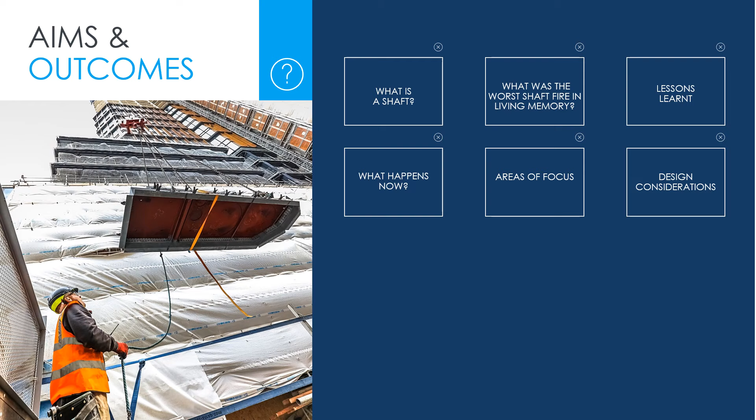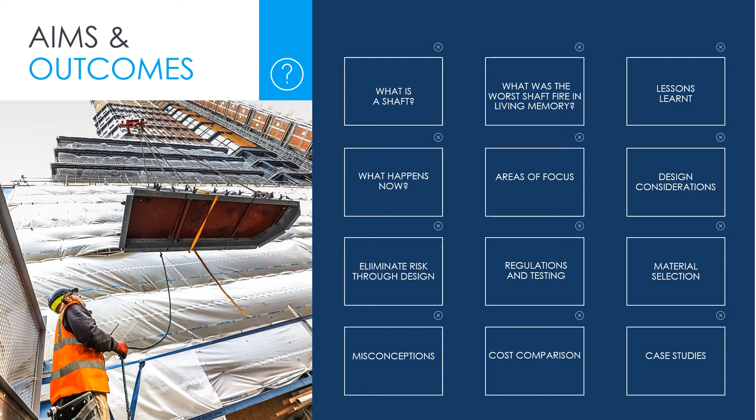We will begin by giving an overview of riser shafts and the challenges they pose. We will then look at the worst shaft fire in living memory to ask whether the construction industry is heeding the lessons learned from this disastrous event. We will explore the areas the industry must focus on to highlight the design considerations which must be adopted to ensure risk is eliminated at a project's earliest stages. We will then move on to give in-depth insight into current testing and regulations, and the materials used in riser construction and the misconceptions surrounding them. Our concluding thought will be one of simplicity, stressing the importance of eliminating risk through informed, efficient design undertaken from a building's very inception.

Ambar Kelly started operating in 2009 as a specialist manufacturer and supplier of modular riser steel flooring. The product was invented and patented by Alex, the managing director. The invention arose from an experience Alex had when he was a project manager for a principal contractor. His boss at the time had taken him to task on the state of the risers. Alex asked what he should do, and the response he received was, 'Invent something.' He was aware that at the time, the current traditional protection was costly and caused delays on projects. So he set to task with what he believed was required to protect riser openings.

He knew the product needed to be cast in to eliminate the risk of falls from the outset. The material needed to be of a solid structure, durable and adaptable to allow for services to pass through. Alex also wanted to invent something that met statutory regulations within risers.

Ambar Kelly has a vast amount of knowledge throughout their team, gained from varying backgrounds within the construction industry. A key focus is on BIM, which ensures all disciplines come together early on, reducing on-site challenges where problems can be detailed out before they reach construction. Ambar Kelly work with principal contractors, frame contractors, architects, structural engineers, and MEP contractors. Our clients consist of the likes of Mace, Lend-Lease, Willmott Dixon, BAM, Wates, McLaren, Multiplex, to name a few.

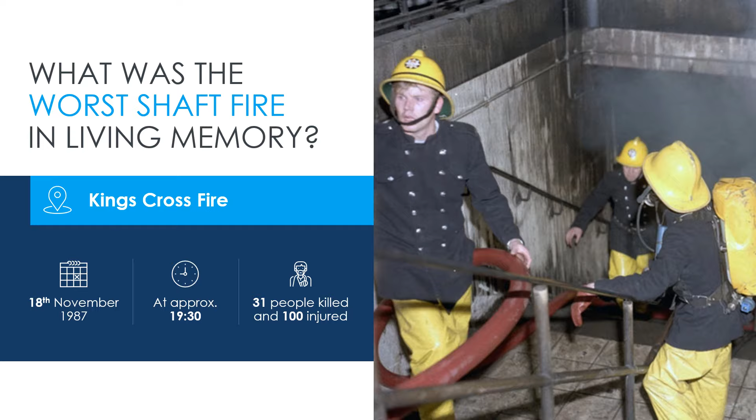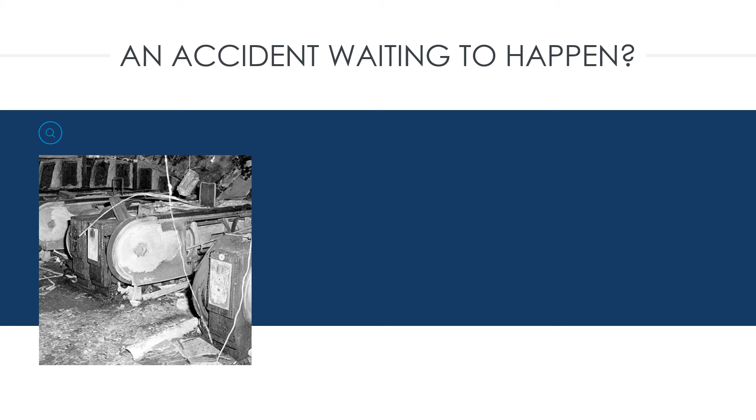But was it an accident waiting to happen? When the public inquiry carried out an investigation into the fire, the cause was a discarded lit match which fell on the timber escalator and rose up the escalator steps. When fire investigators started to examine the underside of the escalator, they discovered there were 17 miniature fire marks from similar activity. But the 18th one actually caught fire.

What made the fire worse? Was it the shaft, complacency, or ignorance? During the public inquiry, computer modelling at the time identified the trench effect, where the flame laid down and superheated the first 20 meters above the fire of the wooden escalator stairs. This finding suggested that the fuel for the fire was the wooden escalator stairs, which were in use for 76 years. It was essentially a dormant fuel cell, an accident waiting to happen.

For this reason, people investigating the cause of the fire questioned the results of the model. They carried out a practical test where they recreated the shaft to see if the exact same results would occur again in a real-life mock-up. And to their horror, they found it did, which validated the computer model.

The King's Cross fire changed how shafts and tunnels of all types are designed, specified and built. With the last wooden escalator in the underground removed in 2013, what were the lessons learned from the investigation into the King's Cross underground fire?

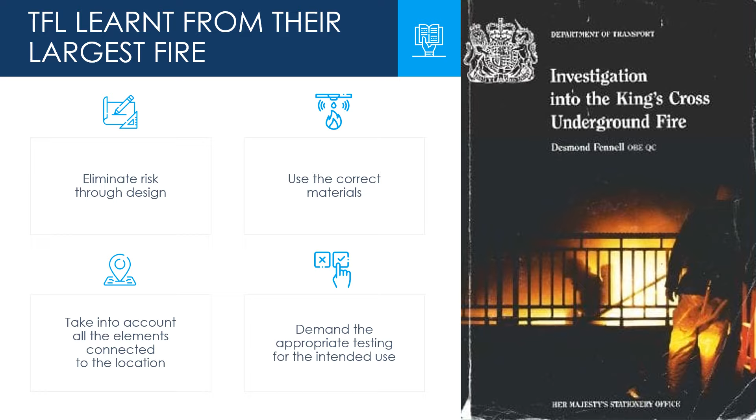For the construction industry, the Grenfell tragedy has had many implications on building design and safety. Lessons learned from both the King's Cross and Grenfell fires include: eliminate risk through design, use the correct materials, take into account all the elements connected to the location, and demand the appropriate testing for the intended use. Isn't it time the whole construction industry learnt from these lessons?

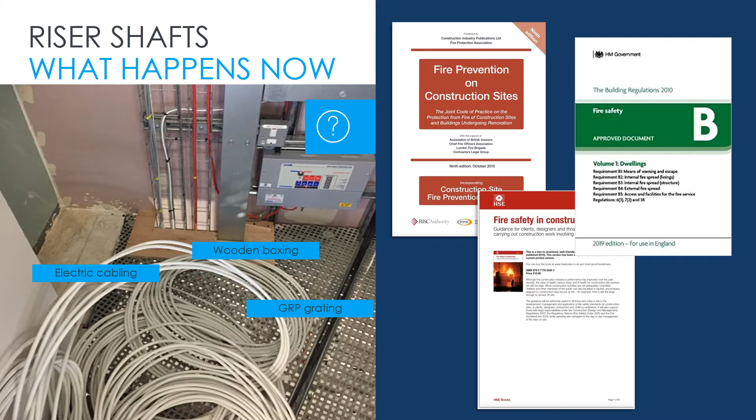In terms of riser shafts in tall buildings, designers need to consider the risks these riser shafts pose and document them in the principal designer's design risk schedule. These risks are well documented in HSG 168, Fire Prevention on Construction Sites, the Work at Height Regulations 2005, Building Regulations 2010, and Approved Document B 2019. The risks are fire and falls from height.

Confusingly, the mitigation measures for the risk of fire are considered differently during construction and when the building is in use. For instance, if we consider a 42-story building with a basement and 2 plant rooms on levels 20 and 40, then fire compartmentation would be required as follows.

For a building in use, as detailed in Approved Document B: 2-hour fire-resisting walls, as shown in Table B4, EI 120. 1-hour fire-resisting doors, as shown in Table C1, E60S. 2-hour horizontal fire stopping at compartment levels 0, 20, 21 and 40 provides 120 minutes integrity and insulation.

For a building under construction, as detailed in HSG 168, Fire Prevention on Construction Sites: design details that prevent the passage of smoke and flames up through a building during the construction phase. 30-minute horizontal fire stopping in shafts every 10 floors - in this case, levels 0, 10, 20, 30 and 40. 30-minute fire doors to all risers on all floors.

Under CDM 2015 regulations, as detailed in Table 1 Designers, when preparing designs, need to eliminate, reduce or control the risks of fire and falls during both the construction phase and for the building's end use.

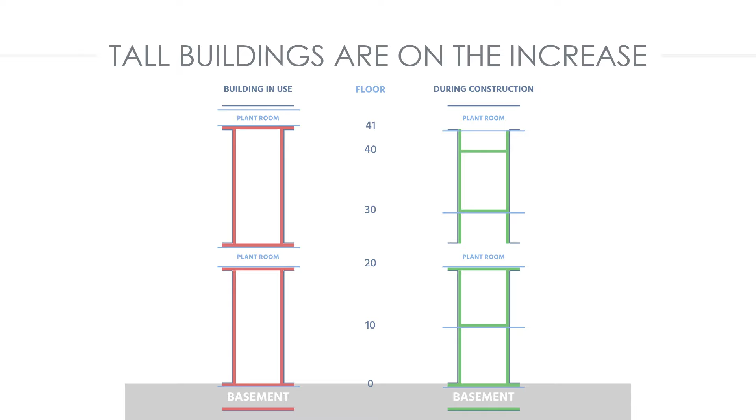So what are the options for the designers to eliminate, reduce or control these risks?

Considerations could include: given that there is a need for a platform within the riser shaft on every floor when the building is in use, allowing for maintenance and servicing to be carried out on ducts, valves, electrical equipment and the like, could that floor be installed early or even cast in to prevent falls from traditional scaffold or platforms during construction? The answer is yes. Metal or GRP grating could be installed to the penetration shortly after casting the floor slab, or a modular steel riser flooring could be cast in.

Given the above, could the platform flooring be used to support the horizontal fire barriers for compartmentation required in both the construction phase and the building's end use? Approved Document B Volume 2, 10.25 states materials used for fire stopping should be reinforced with, or supported by, materials rated Class A2, S3, D2 or better. GRP grating is EN BS 13501 Class C-S3, D2 and so could not be used on fire compartment floors 0, 10, 20, 21, 30 and 40 in our example stated, so an alternative product would be required.

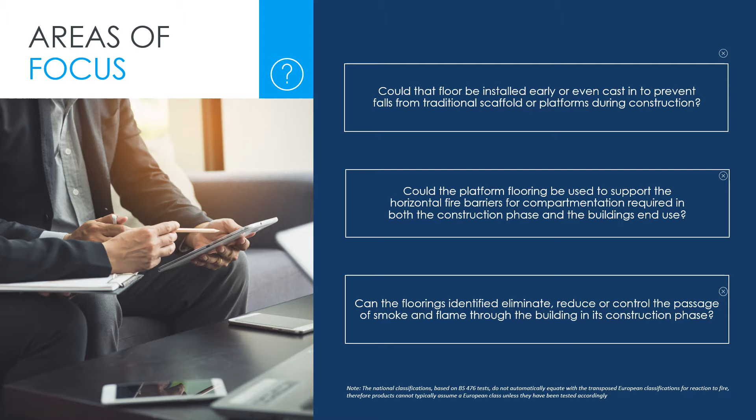The principal contractor has to avoid risk where possible, and advise the principal designer of risks. The client needs to understand the importance of the riser shaft and the risk posed to clients - brand damage is greater than the cost of risers - and their responsibilities under CDM 2015.

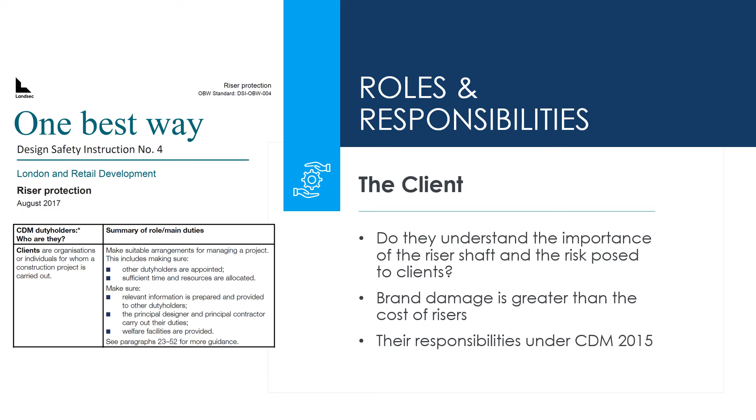One of the most forward-thinking developers in the UK is Land Securities, also known as Landsec. They have produced their own best practice guide called One Best Way Design Safety Instruction No. 4. Within this guide, the company has mandated riser protection within building design and has formulated a concise riser strategy which stipulates that health and safety are of paramount importance.

In order to reduce risk through design, the CDM 2015 regulations, Construction Managing Health and Safety in Construction, should be consulted, as this document states to avoid risk where possible - Page 8, Section 5A.

Digitization is going some way to reducing risk throughout a building's life cycle. It is crucial, therefore, to take advantage of the latest technological advancements into BIM. The BIM design builds everything in the virtual world, so when it comes to the real world, the risks have been reduced. All of the clashes have been removed, making for a far more efficient construction process.

Regulations and testing.

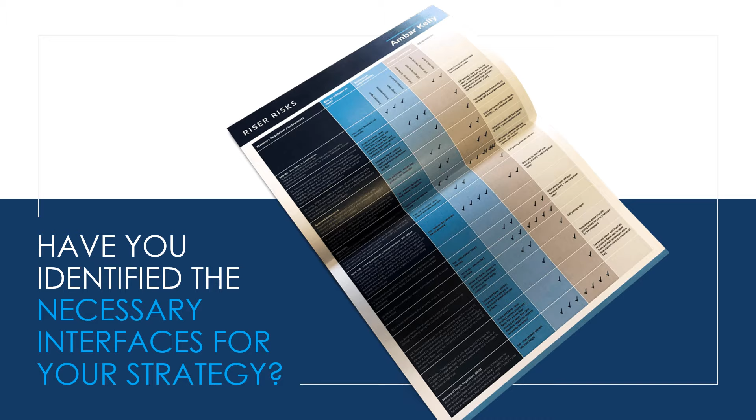Have you identified the necessary interfaces for your strategy? Looking at riser risks and the regulations, there are 13 clauses which touch the riser zone from 4 different guidelines, regulations, and legislation. 12 of these clauses regard fire, and 1 is on falls from height.

Are you designing to all the regulations? The following regulations include fire prevention on construction sites, Joint Codes of Practice, the HSE Fire Safety in Construction Approved Document B, and CDM 2015.

When designing a building, have you reviewed the Joint Codes of Practice, as this will affect your insurance? Have you consulted the HSE regulations for health and safety? Does your design meet Approved Document B? And are you fulfilling your obligations outlined in CDM 2015?

Approved Document B 2019 uses the European classification system for reaction to fire set out in BS EN 13501-1. The standard classes are A1, A2, B, C, D, E, and F.

Classifications for floor materials have slightly different tests, and the class above should be followed by the suffix FL, as in BFL.

Rather unusually, the flooring within a riser is likely to be one product, and so the platform under your feet should be tested in accordance with the floor material test. However, the platform above you is a ceiling, so should be tested in accordance with the standard class tests.

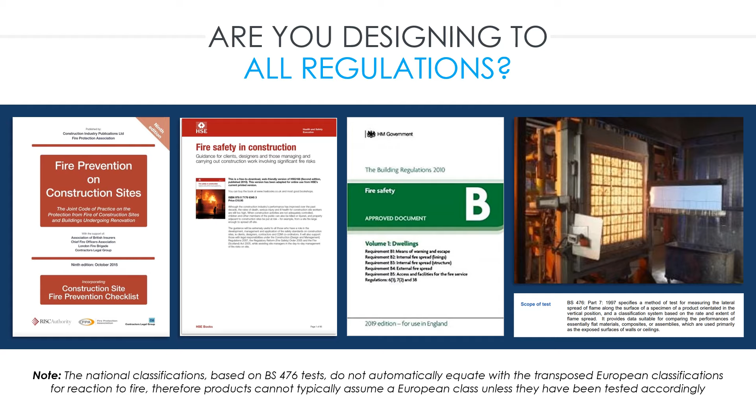The importance of material selection cannot be stressed enough. Therefore, it is essential you consider the combustibility and flammability of the products you specify.

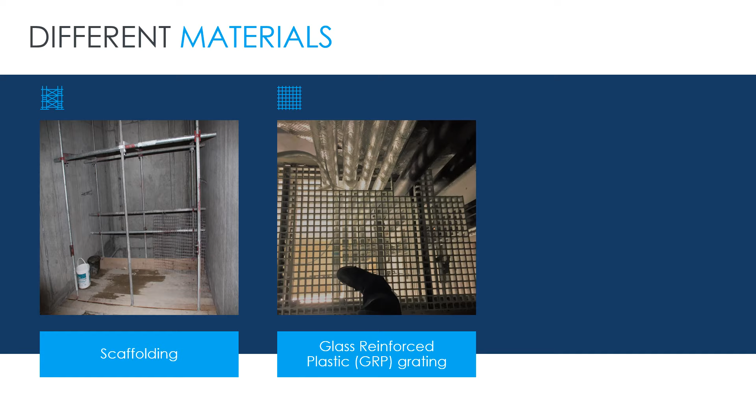Materials burn differently in shafts. Scaffolding doesn't stop fire, and the wrong type of glass-reinforced plastic grating actually acts as a fuel source for fire. However, modular steel riser floors are an alternative which do not burn, nor do they add to the fuel loading of a building.

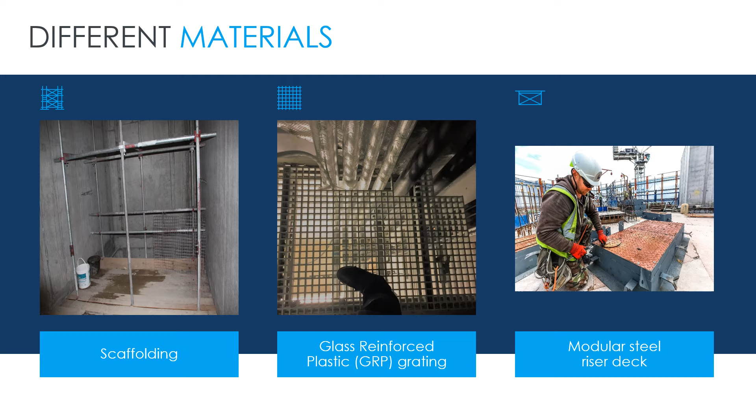Stopping the spread of smoke and flame is essential for the safety and well-being of everybody working on a construction site and through to building occupation and operation. Yet at present, falls from height and not fire is the focus, purely because it is the visible risk. Without sufficient foresight, hidden issues go unnoticed.

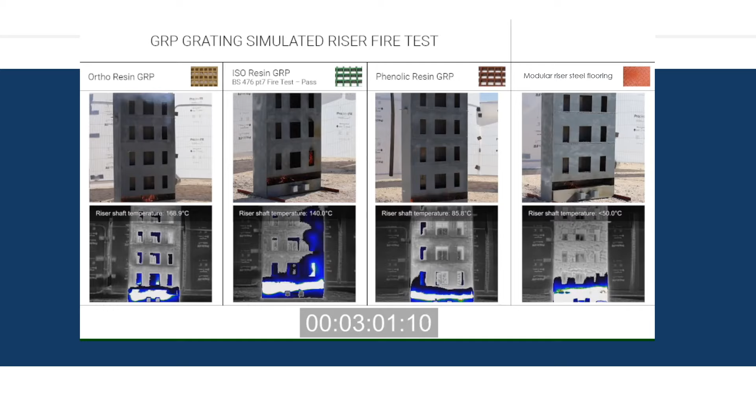Currently, there is no relevant fire test within the British standards for riser shafts. But we have adopted a clever principle which has been informed by the public inquiry into the London Underground fire at King's Cross. An independent fire test was performed on a smaller scale to establish the burning characteristics of various products regularly employed in riser shafts.

In this video, you'll see the real-time video, thermal video, and the temperatures. They are all synchronized to establish the visible burning characteristics of the most popular products used in the construction industry today. The 4 products in this video are ortho-resin GRP, iso-resin GRP, phenolic resin GRP grating, and modular riser steel flooring.

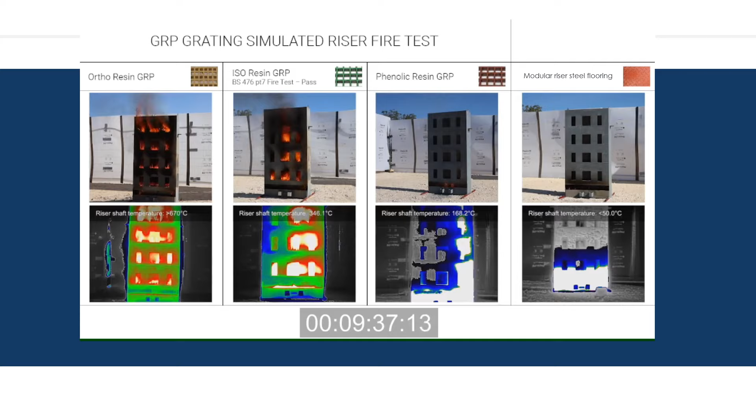From the videos you can see the ortho-resin GRP burns and can do so at temperatures above 670 degrees Celsius. The iso-resin GRP grating is said to meet BS 476 Part 7 standards, but also burns at temperatures above 670 degrees Celsius. The phenolic resin GRP is the only approved GRP product used in the London Underground.

When we're thinking about the design of the riser shaft, we must be considering the regulations. We must be aware of the requirement to stop the spread of smoke and flame between floors to protect the construction workforce during the construction of a building.

And when testing, we should be looking at the products employed in a riser shaft, as they have different burning characteristics. The last of these examples show the modular riser steel flooring.

The temperature in the riser shaft never gets hotter than 50 degrees Celsius. The flames never reach above the first level on the diagrams. It lasts over 90 minutes with 1000 degrees Celsius underneath it, without any loss of integrity.

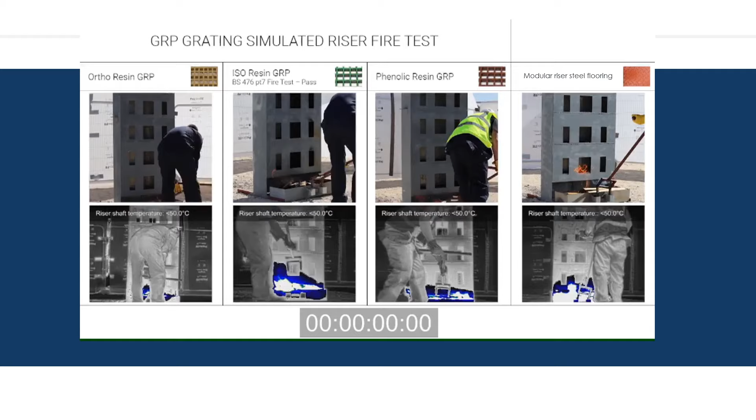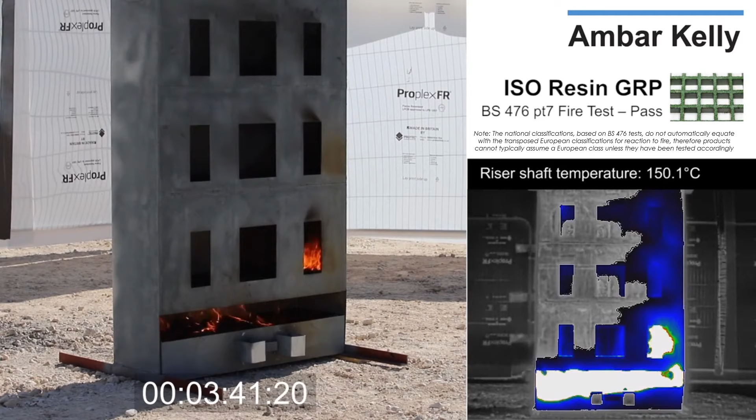This is the iso-resin GRP grating, which is said to meet BS 476 Part 7. In this video, it burns and reaches a temperature of 662 degrees Celsius. From this example, it is quite evident what happens when the iso-resin GRP, which is made from an oil derivative, burns at hot and dangerous temperatures. In fact, GRP grating cannot accurately be tested to BS 476 Part 7, as grating does not meet the test criteria.

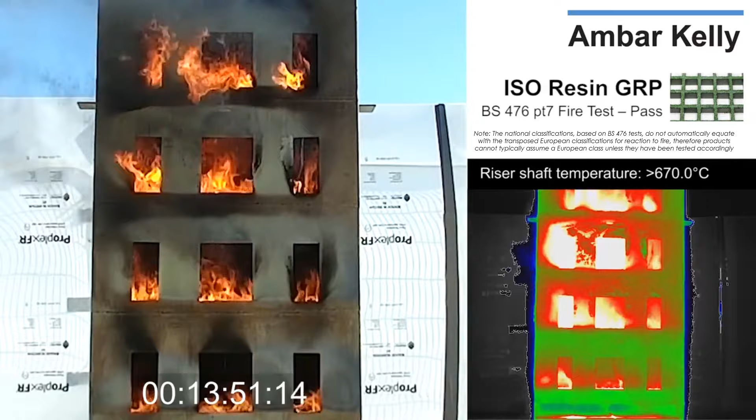Testing of steel modular riser floors. The Fire Prevention on Construction Sites document summarizes that risers, shafts, ducts and similar openings between floors should be closed off with temporary fire doors on every level at every opening. However, if modular riser steel flooring is used on a project, temporary fire doors could be omitted, as this solution is a physical barrier to the spread of smoke and flame.

Modular riser steel flooring also doesn't burn or contribute to the fire loading of a building. Caution needs to be exercised when gaps occur during installation tolerance for vertical MEP services and the floor plate. These must be closed off with a suitable temporary fire product to maintain the protection for 30 minutes. The regulations call for horizontal compartmentation within the riser shaft.

It's very easy to create a horizontal fire barrier using pre-designed products, such as modular riser steel flooring. If you take the examples in the two left pictures, the steel modular riser flooring would act as a barrier to the spread of smoke and flame for 1.5 hours up to a temperature of 1000 degrees Celsius and will not add to the load of a building. A fire compound can work in conjunction with the steel riser module to provide further protection.

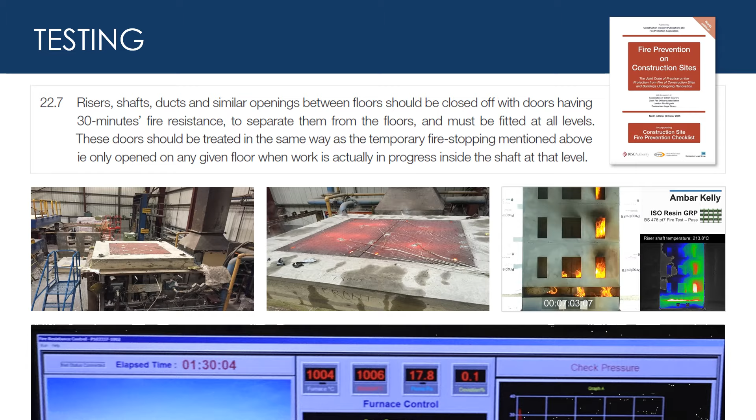This meets regulations as it is non-combustible and non-flammable. When tested, it lasts for over 1.5 hours with 1000 degrees centigrade underneath it, proving integrity. GRP grating, however, after 7 minutes reaches a temperature of 214 degrees Celsius. At 12 minutes, it reaches 662 degrees Celsius.

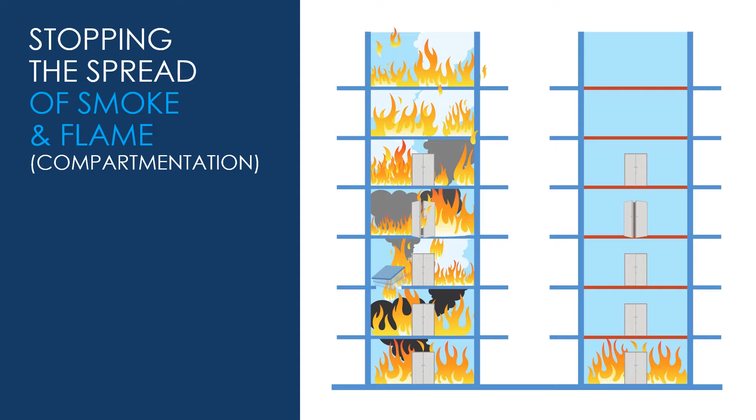However, if you use modular steel riser flooring at every level, horizontal compartmentation is achieved. The spread of smoke and flame is wholly prevented, as the modular riser flooring is made of steel, which will act as a barrier to the spread of smoke and flame.

These tests, which were carried out by an independent testing house known as the Building Research Establishment (BRE), showed no loss of integrity or insulation over 2 hours when combined with the fire compound and the modular steel riser flooring.

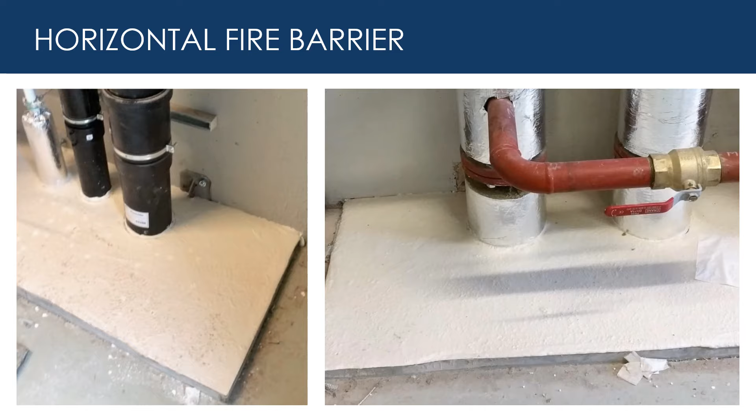This is a finished example from 52 Lime Street, London, of a horizontal fire protection barrier between a plant room and a shaft. These barriers are highly efficient if the right strategy is employed. In this example, you can see the modular riser floor plate has been recessed to act as formwork for a fire compound to be installed, offering in excess of 2-hour fire protection without loss of integrity or insulation.

Let's look at the pros and cons.

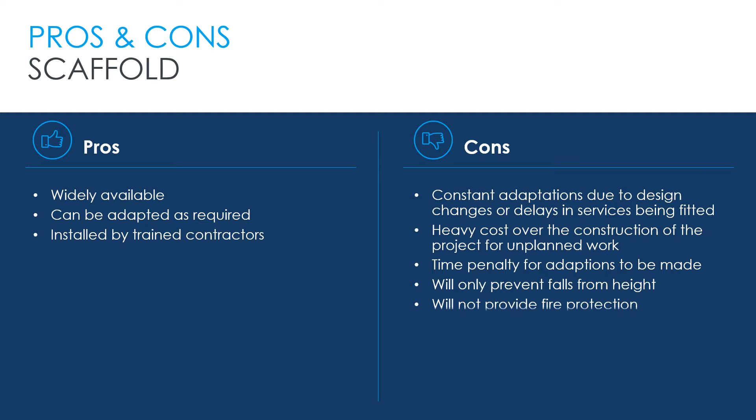If we look at the pros and cons of scaffolding, the positives are: widely available, can be adapted as required, installed by trained contractors. The cons include constant adaptations due to design changes or delays in services being fitted. This has a heavy cost over the construction of a project for unplanned work. Time penalties for adaptations to be made. Scaffolding will only prevent falls from height and will not provide fire protection.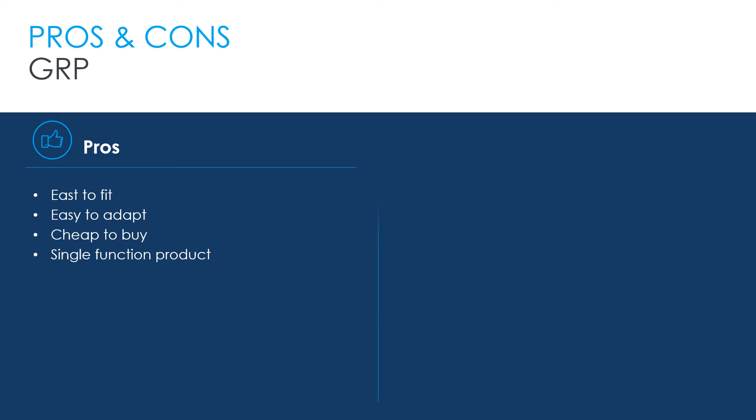GRP plastic grating. The pros include: it is easy to fit and adapt, cheap to buy, single function product. The cons: it burns fiercely, easy to affect its integrity, needs structural steel to support the grating when cut for services. There's working at height adaptations. It's flexible, but it needs strengthening. Flammable and combustible. Costs can escalate during building due to adaptations. Heavy captured carbon content, the highest in the industry.

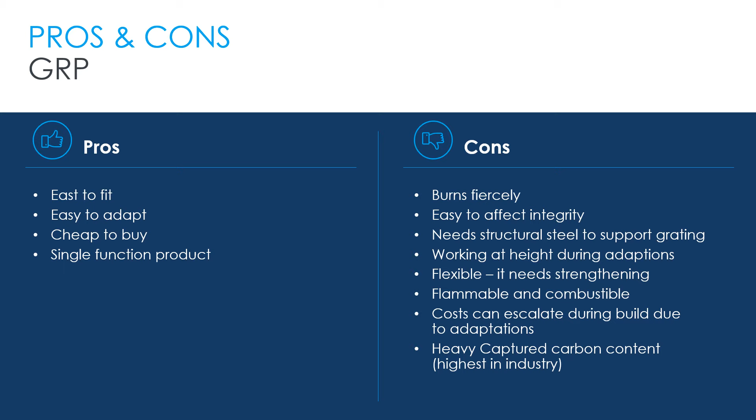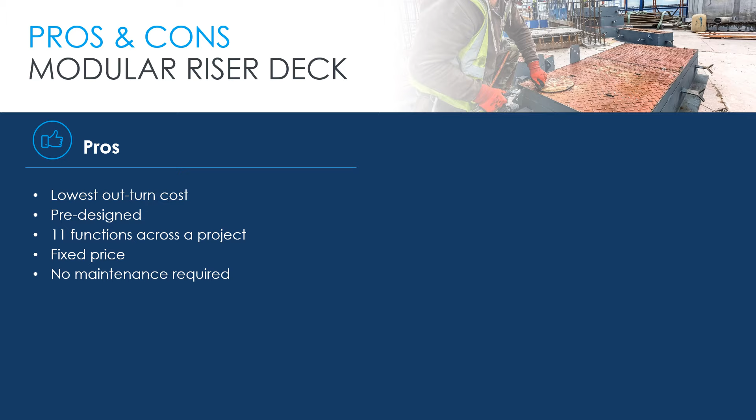Modular steel riser floor. The pros: lowest outturn cost for the project. It's pre-designed. Has 11 functions across a project. It's a fixed price. There's no maintenance required. Does not burn. Built off-site. Prevents falls from height through the build process. No ongoing adaptations required. Lasts the lifetime of the building. Easy to recycle. The cons: higher entry price. Relies on early design. Needs buy-in from all parties.

This is an illustration of a holistic riser strategy. At present, M&E contractors sometimes look at installing riser modules in 3-floor lengths, which is about 12 meters. The illustration on the left shows a building using 3-story riser modules, while the diagram on the right shows single-story riser modules.

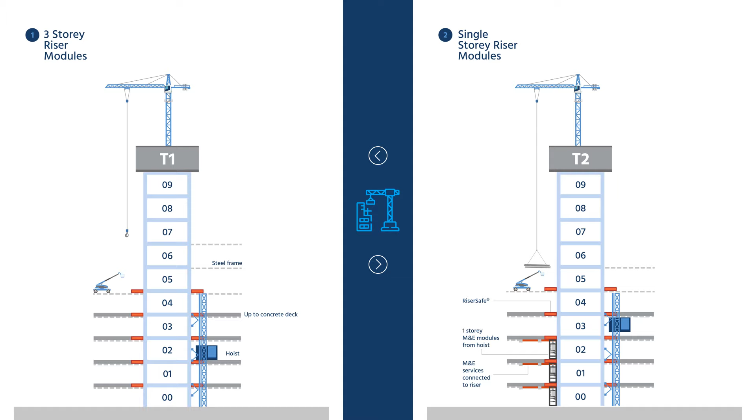We're encouraging the use of single-story riser modules, as they are quicker and easier to install, and allow other packages of work to be completed at the same time, so as not to disrupt construction. Single-story risers are inserted at every level with a hoist and are not crane-lifted into position 3 at a time, as would be the case with 3-story modules.

On the left side of this slide, the 3-story riser modules have not been installed, but on the right side, single-story modules have been installed. In this example, the risers are being installed one at a time along with other packages of work, such as M&E services and dry lining. It is a seamless process where everything is done in unison.

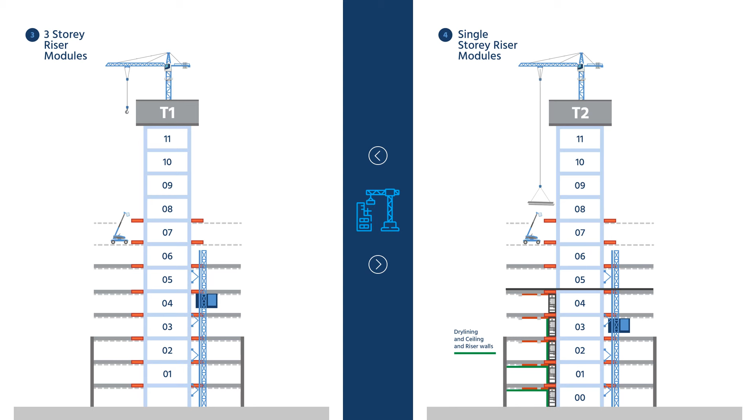Now the 3-story modules are only just being installed. Conversely, on the right side, 5 floors have been finished completely. The single-story riser modules, M&E services and dry lining are all now in place. Adopting a single-story riser module strategy reduces total construction time by 7 to 8 weeks, making for an uninterrupted construction process without added costs and time delays.

Furthermore, to meet the Codes of Practice and HSG 168, openings need to be closed off on every level. The riser shaft on the left has to be open all the way to the top for the 3-story modules to be installed, whereas on the right, the single-story modules seal every opening at every level, meaning fire cannot spread should it occur.

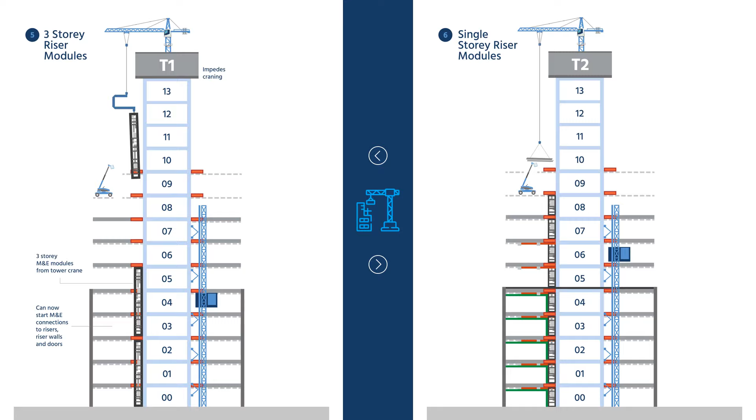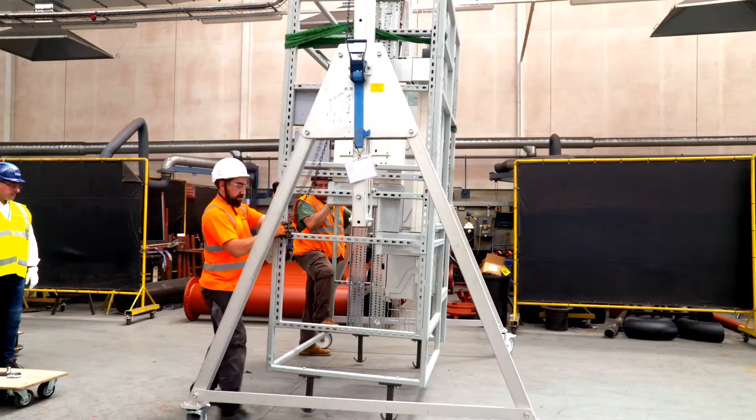Here are some examples of a single-floor height module. The electrical module is on its side and is lifted into a vertical position. The pallet truck wheels the unit over the top of the riser flooring and straight into position. It took less than 4 minutes to install this. There's no waiting around for the building to reach the right height before the modules can be lowered in.

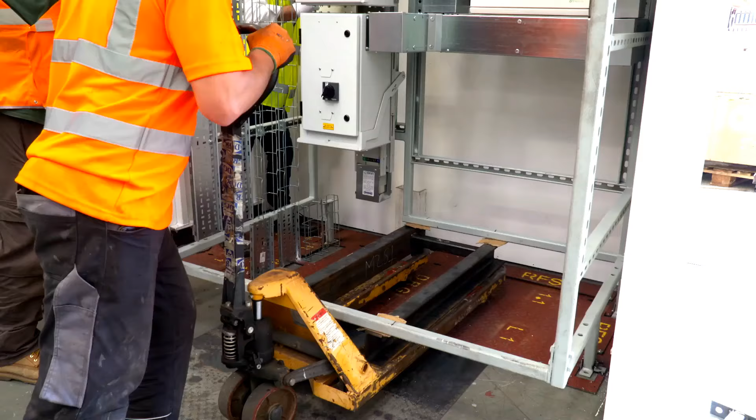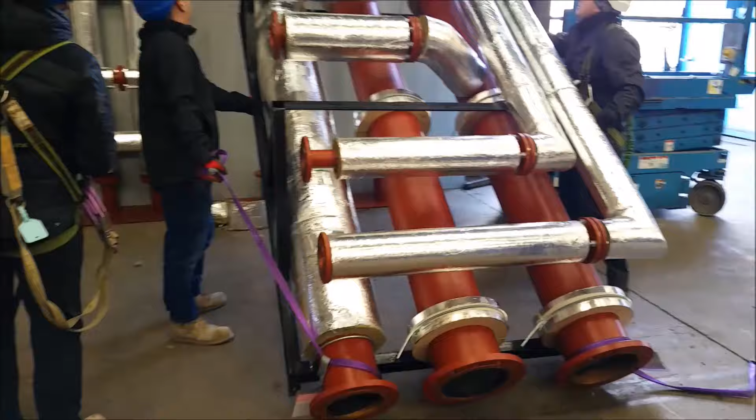This is an example of an M&E modular installation system for 52 Lime Street. A mock-up scenario in which a single-story module was installed using a hoist and electric winches. This was installed quicker than a 3-story system that is crane-lifted into the shaft.

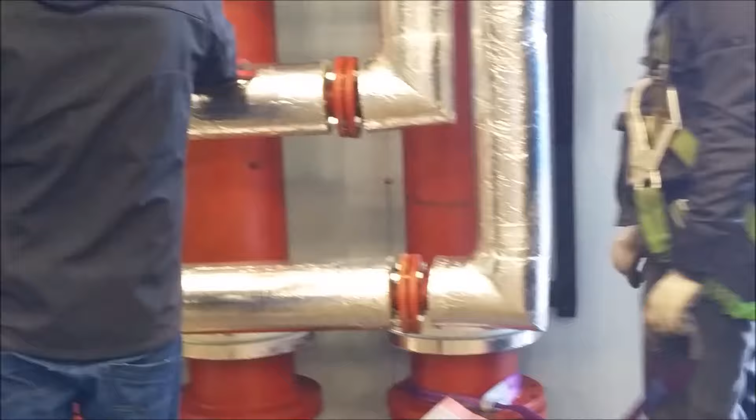In the video, the M&E single-height unit is being lifted into position in 2 minutes and 50 seconds. In this mock-up, it took less than 2 hours to install the system. This system was used on all 37 floors of 52 Lime Street.

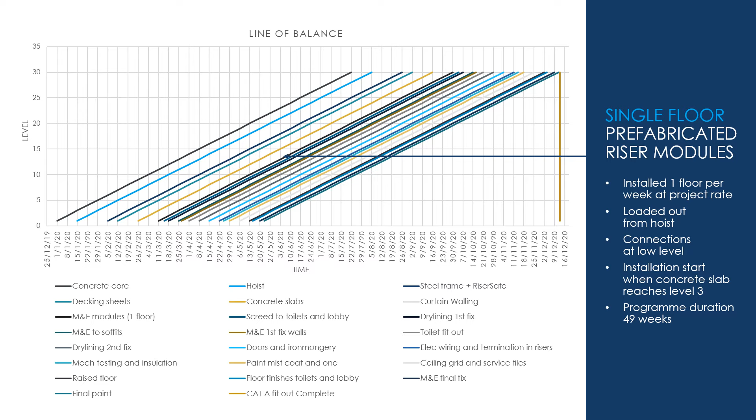Cost comparisons. What are the real benefits against cost? We have taken the standard 2.5 by 1.5 meter riser opening running up 11 floors and have modelled the costs of 3 more established riser zone protection products.

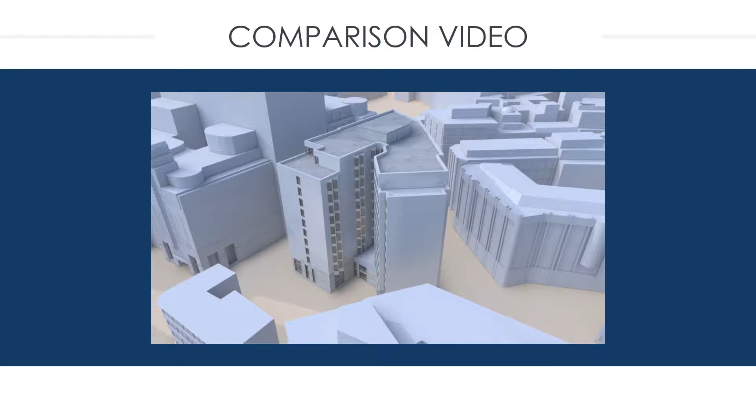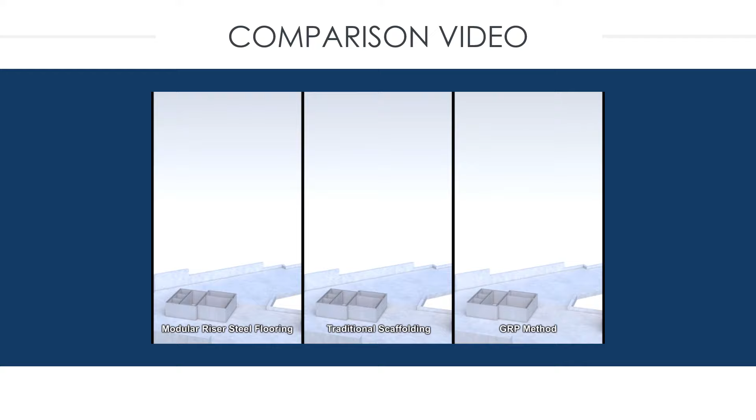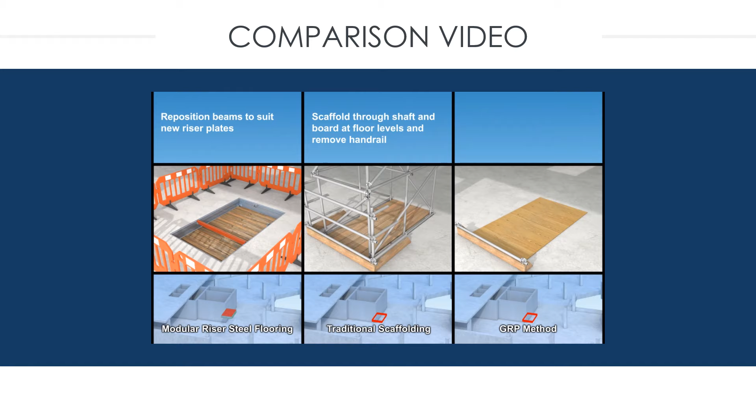You will see that we've split them into 3 separate and distinct methods: the modular riser flooring, which has been cast in; traditional scaffolding, forming the hole with temporary shuttering and trims; and the same with the GRP method. You will see that as they go through the construction cycle, they're still constructing scaffolding and GRP, whereas services are actually being fitted significantly earlier with the other option. In the program, we established a 30% time saving in the construction of the completed riser shaft.

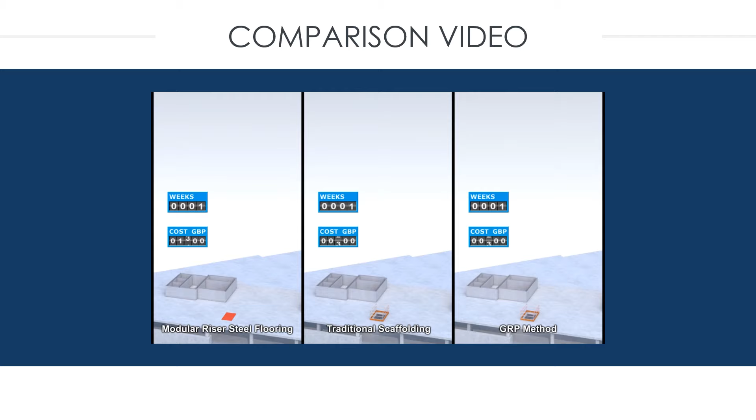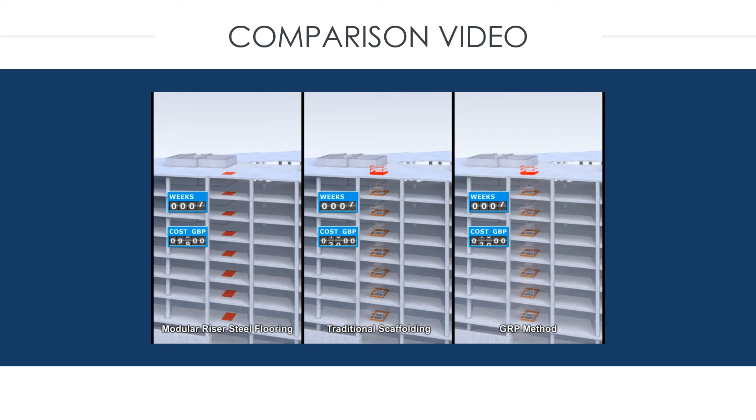Now within this video, we've identified the cost of the three established methods. You will note the cost for the modular riser steel flooring demonstrates the cost increases significantly at speed. But then a strange thing happens. The costs stop.

When initially looking at the cost, most people only look at it from one perspective. When making a judgment based on price and not function, it will be obvious that people would select the cheaper product. But if you actually break down the costs over the life of the riser shaft on a project, you can see the cost of a modular riser flooring sits considerably higher. It is almost 50% higher than the GRP grating in the frame package.

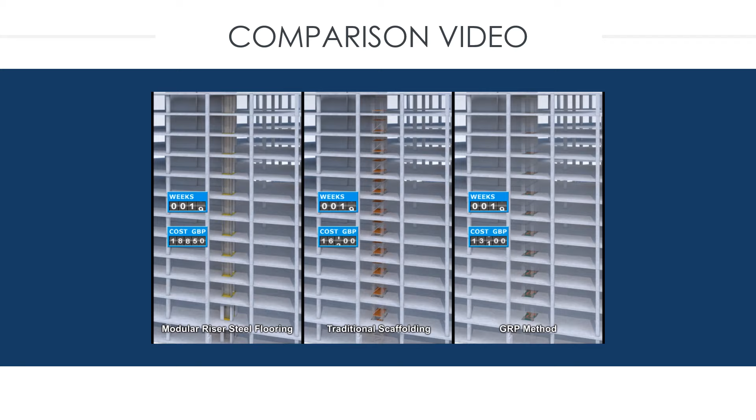But we must understand that it's not just the frame package. It is the roofing, the dry lining, the general build, the builder's works, mechanical and electrical and the scaffolding costs over and above the costs of the full protection, which make costs grow.

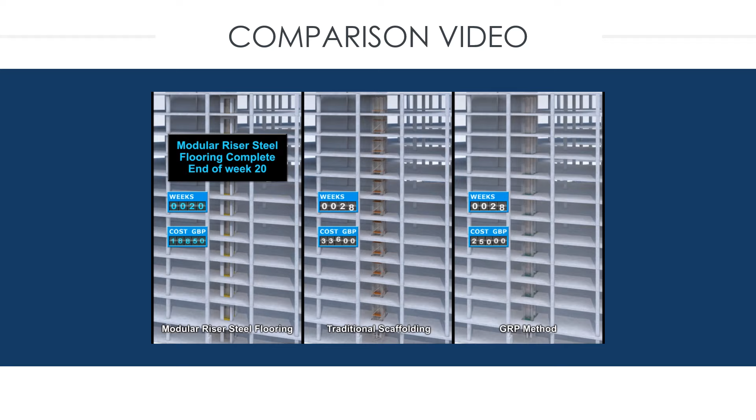If you get it designed right first time, you have eliminated risks from falling from height, stopped the spread of smoke and flame, designed where the services will penetrate for fast, quick and easy installation in perfect safety, removed hidden costs or non-tangible costs which occur on every project that is unplanned.

Commercial teams will analyse these comparisons and look to buy the solution in the phenolic GRP package, which they believe will save on cost and provide full protection.

The initial cost of phenolic GRP compared to the modular riser steel flooring is lower. However, there are accumulative costs as the project progresses. Roofing, M&E, dry lining and scaffolding are costs which are not associated with the frame, but they do add up. It means the project arrives at an outturn cost far higher than expected.

The cost of modular riser steel flooring, however, doesn't change, as it is a bespoke system which can incorporate all of these packages of work. To minimize project costs, it is crucial to start with the end in mind. Looking holistically at the riser shaft and considering its design from the outset will allow project teams to reap the cost savings.

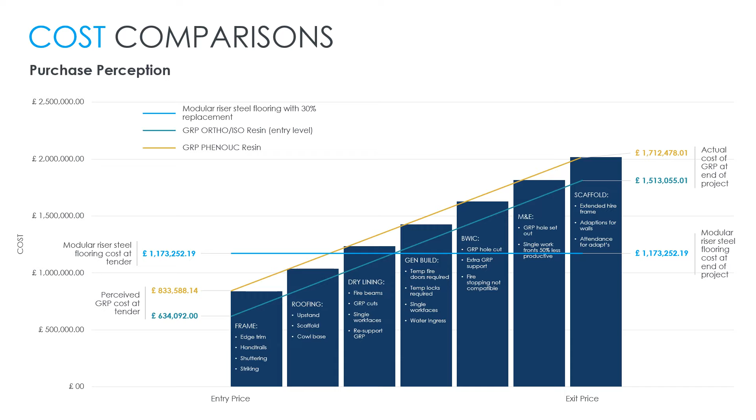There are 11 functions of the modular riser floor. It saves money on shuttering and trims and removes the need for handrails, because if you haven't got a hole, you haven't got a risk. To put it simply, you don't need the handrails.

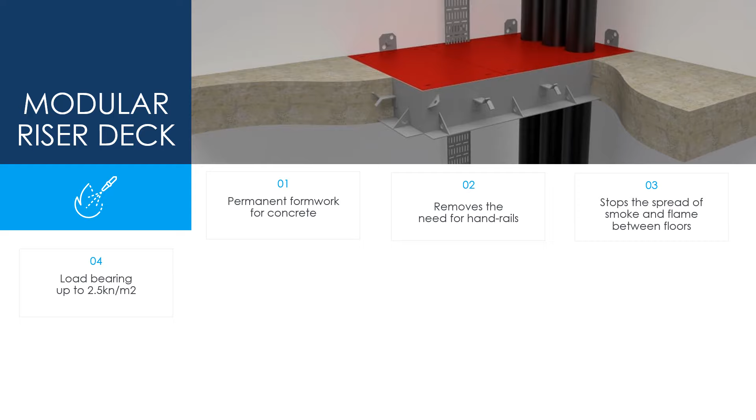It also stops the spread of smoke and flame between every floor, as it is a physical barrier to fire and smoke. This solution has a load-bearing capability of up to 2.5 kN per square meter.

Depending on the design, the floor can provide a storage area for materials. It can be the formwork for horizontal fire protection and can be fixed points for separating walls and firewalls. It is part of the fixing points for mechanical and electrical services. It could be the casting and weathering properties for the top of service riser shafts, and it drives design to an early completion, regulation and testing.

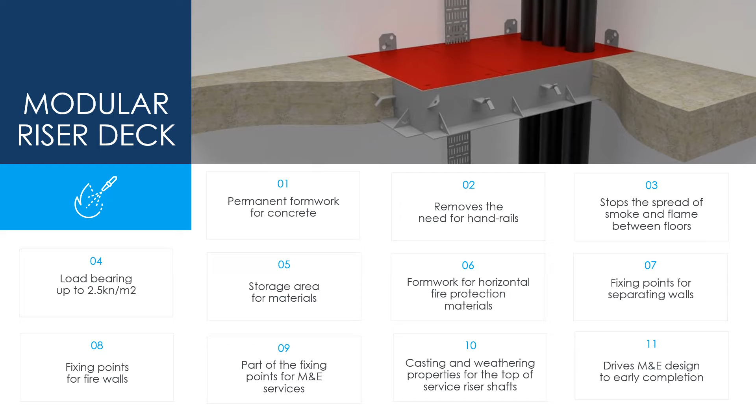This video signifies that if a holistic riser strategy is adopted, the whole is formed and protected and lasts throughout a building's life cycle. It allows all the trades to work safely without risk and delays, making it completely safe for the construction teams and the building's occupants and users.

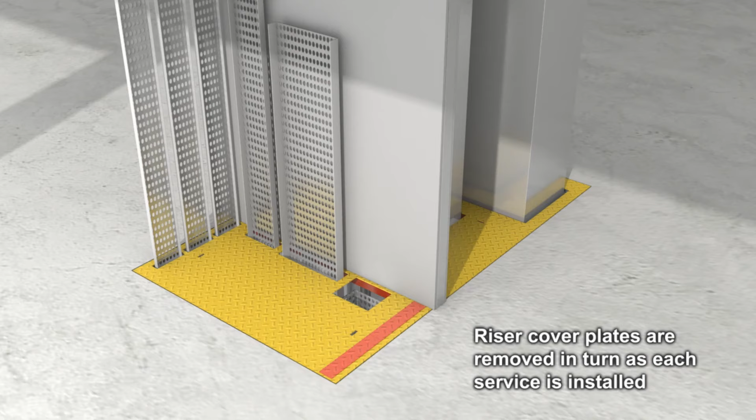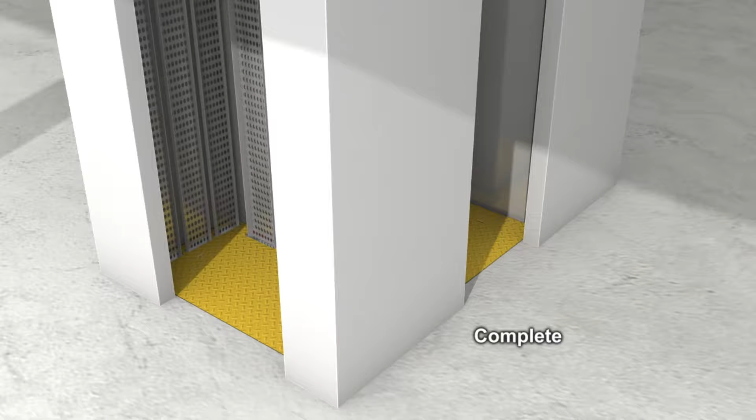Damac Tower, another excellent example of modern architecture. This stands over 52 floors and utilised modular riser steel flooring on every opening on every level. It is one of the most technically challenging projects in London to date.

For the One Triton Square project, additional floors were installed on the top of the original structure with a completely new design. Its new design connects the old and the new and was carried out to great success.

As we end the CPD, the industry would do well to eliminate risk through design, change habits, understand the true cost, understand material selection, falls, fire, cost and time, eliminate risk through design.